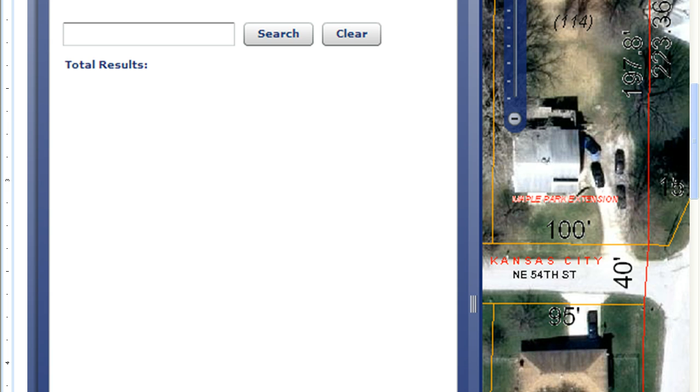The property is a long rectangle. This faces predominantly west, the front of the house. Up at this end here, the elevation slopes downward for a total drop of 34 feet from front to back, sloping downward into a creek, about 1/3 woods and an 8-foot wide creek down here at the bottom.

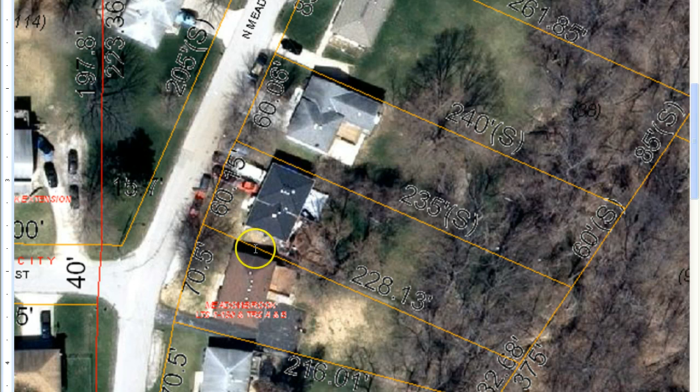There is substantial water runoff from the top of the hill over in this area across the hard surface here on the road, and this is carried away predominantly by low points on both sides, north and south along edges, that the water just rushes back down here.

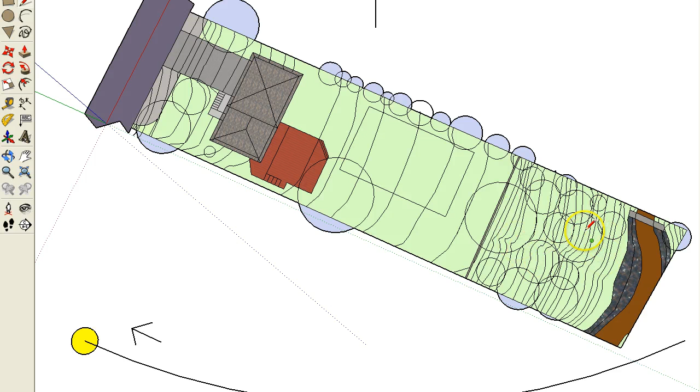Goals for the property include a lot more planted edibles, food forest toward the back of the property, and shrubbery, bush size edibles, berry plants, etc. everywhere else. Looking for water storage and possibly combined with swimming and exercise near the house somewhere. We're after a greenhouse, somewhere close to the kitchen, a kitchen garden with herbs, other vegetables, etc.

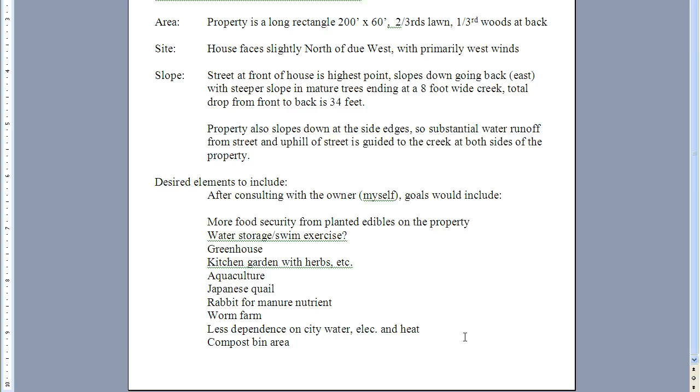Looking for aquaculture, perhaps with tilapia, certainly water plants. We'd like some quail, probably the smaller Japanese quail, and one or maybe more rabbits, primarily for manure. The same thing for a worm farm. And it'd be nice to have a little less dependence, a little more backup than relying purely on city for water, electricity, and heat. Also looking for a compost bin area.

Suggested improvements to this property include the following. We need to catch some of this water that's getting away. It's a substantial runoff. We want to divert the water into swales at both edges of the properties. I'd be aiming for a hugel bed, not a large one, but a continuous one along the property edge, to make sure the water stays on the property and out of the neighbors' yards and gets to our swales.

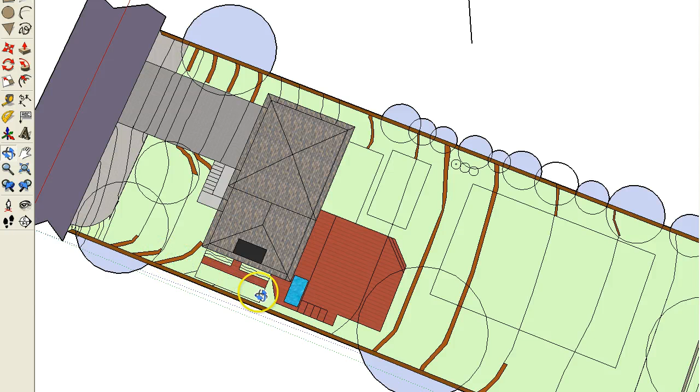We have swales on contour on both sides of the property, fairly short swales. On the mound side, we'll be putting in shrubs, edible raspberries, blackberries, gooseberries in the shadier spots, etc. Sills on the swales will probably be located on both ends to assist the water to get to the next swale and downhill, hopefully capturing most of it, but we expect water to continue to move downstream.

We have 3 water impoundment areas. The first would be to also catch rainwater initially, rainwater coming off the roof, working into a custom-built storage tank, storage bin. This is under the first level of a 2-level deck. There is a ground bottom thing here that can catch water runoff and be filled, roughly 6 feet by 7 feet. Overflow from that would continue on out to the hugel bed to be guided down to the next swale.

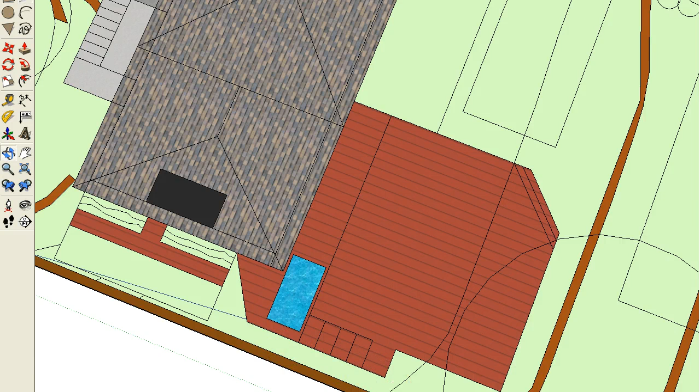Our next water impoundment area will be at the corner of the property just before the back fence. There's a low spot, looks to be ideal for a roughly 10 by 10 foot aquaculture pond. We're in Clay County, if that gives any indication of the likelihood of good dam building soils, and hoping for tilapia raising there, and also water plants, water chestnut, etc.

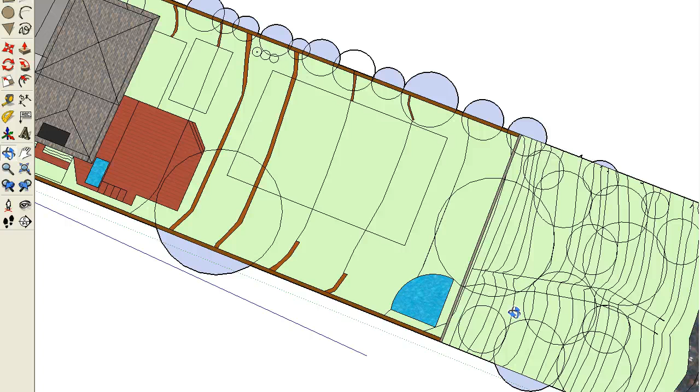Depth roughly 3 foot. Below that, past all the forested area, we have a creek location, roughly 8 to 10 feet in width. Seems to be a perfect dam location down toward the upper edge of the property. This will back up onto the neighbor's property if I run at a full 3 foot depth here. He's okay with that. This is a very remote area back here. Nobody ever is down there.

On my property alone, this will result in a minimum of 500 square feet roughly just on the creek bed alone at a full 3-foot depth, considerably more as it runs into the shallows to the side. This large circle here represents a current walnut tree. Good production from it. There is a problem with that walnut tree.

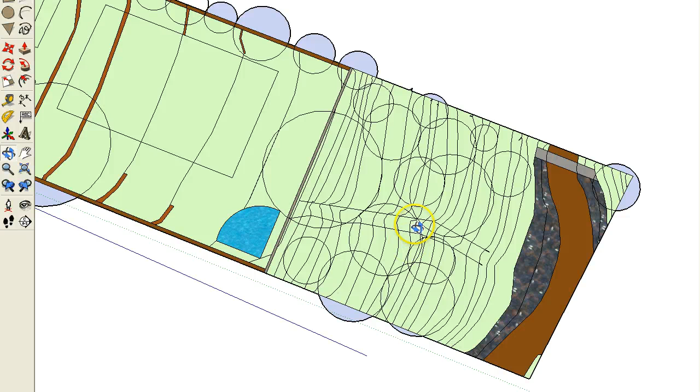There's erosion at the base caused by an erosive area that's maybe 2 foot deep coming down this section here. We need to add dirt in here, even that out, and then swale across it to slow that erosion down and keep it from re-eroding. Dirt in this area is about 8 cubic yards for $200. Not expensive, and should get this done plus quite a bit of other projects.

A quick photo of the base of the walnut tree shows the erosion. Here is a photo of the creek bed itself. Location, the down tree represents one edge of the dam, a lower shot of the dam location here. As we bounce up to the top of the property, we're catching runoff from this area here. Comes down the street, and we have a similar problem at the other end of that.

This curves around. You can see contour flags laid out for location of the swales. The other side of the yard, similarly, flags laid out for swale locations. Slow that water down. Here's our main spot for the greenhouse that was recommended earlier. Coming out here, checking sun angles for this latitude. The neighbor's house is set back far enough there's no conflict there.

This greenhouse would use a deck level with the first floor, and at that point we'd probably bring that deck out only about halfway, 4 feet or so. The quail and rabbit hutches could easily winter underneath that deck. Halfway out there'd be room for crops in front, and the deck coming out here would allow for a couple of benches here.

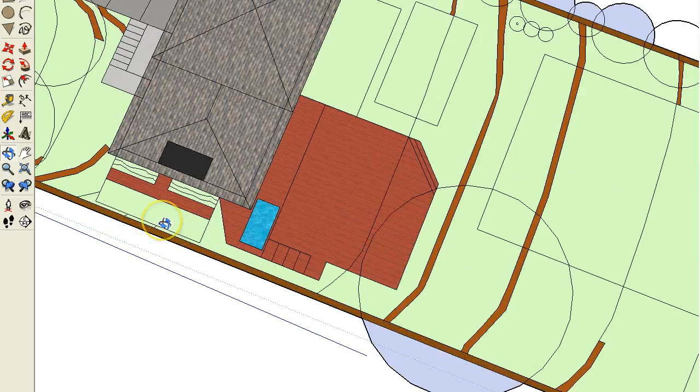In addition to underneath the deck in this portion here for winter quarters for rabbits and quail, there's certainly plenty of room for them to be tractored over top the septic system here, which is listed. Not much good for growing anything else. Kitchen garden location is in this space here. Should be close enough to the outlet of the deck that it's easy access.

The requested worm farm can be located at this end of the deck for easy feeding of the worm tea down to here, or an alternative to that is in the greenhouse, both accessible easily from the kitchen for adding garden scraps, and tea can get to this location also.

The house itself is already fairly efficient from additional insulation added here, windows being replaced and beefed up on all sides here. For photovoltaics, it's fairly cost effective these days. For a panel on this side of the roof, can be fed down to the basement for a battery bank, charge controller, and inverter. Can also be tied in with a location to enclose a generator underneath the deck here.

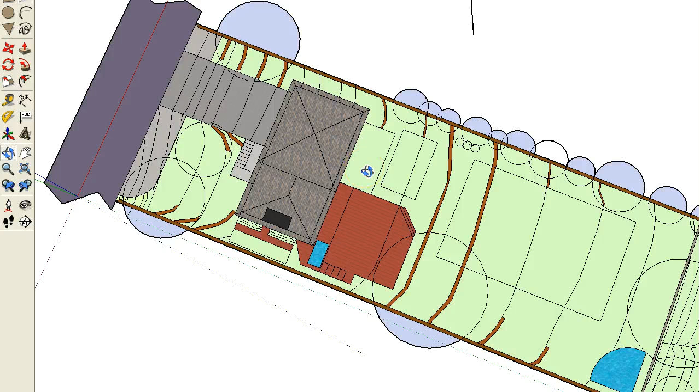There's room behind the house here for a second glass house sunroom area for additional plant startings. And we have compost bins located just slightly down the property here. Should be easy access for completed humus to get back to the kitchen garden.

That's our overview. My congratulations on an outstanding course. Best to all.